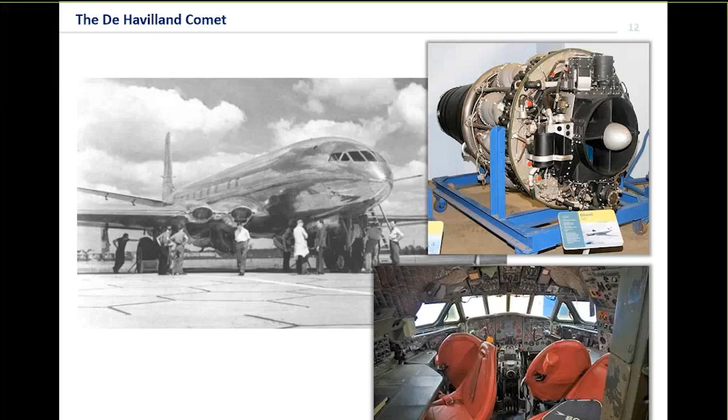In terms of aircraft of its type, it was 10 years ahead of its competition. The Boeing 707 first flew in 1958. It flew twice as fast as any other commercial aircraft of its day, at 500 miles an hour. And for comfort as well as economy, it actually flew much higher than any other aircraft, at 40,000 feet.

Now, it was built for comfort. Sir Geoffrey de Havilland, the company owner, really was taking his lead from luxury travel of the trains at the time. So he built it with large square panoramic windows, just like you would have in a train. Because it flew so high, it was the first airliner to ever have a pressurized cabin. And it pioneered the use of stressed skin construction that used both rivets and adhesive, so a hybrid joint.

It was the first commercial airliner to store fuel in the wing cavities. First commercial airliner ever to have power-assisted flight controls. Strangely enough, they were hydraulic controls. Because the hydraulic controls took away a lot of the feel from the pilot, it pioneered the use of a simulated control feedback as well. Things that we see in every airliner today, really. That was called Q-feel. And everything about it really set the design for pretty much every airliner until we get the new generation of composite airliners today.

Of course, when you're pioneering something that is so revolutionary in so many areas, you're going to get design challenges. And the biggest challenge for the Comet was weight. Weight was an absolute premium. De Havilland wanted to use his own jet engines that he'd bought the company previously. They were the de Havilland Ghost, but they were very limited to just 5,000 pounds of thrust. In fact, they were so worried that the airliner wouldn't get off the ground that the original plan even had booster rockets. So I'm not quite sure what they would have done about the noise abatement in those days.

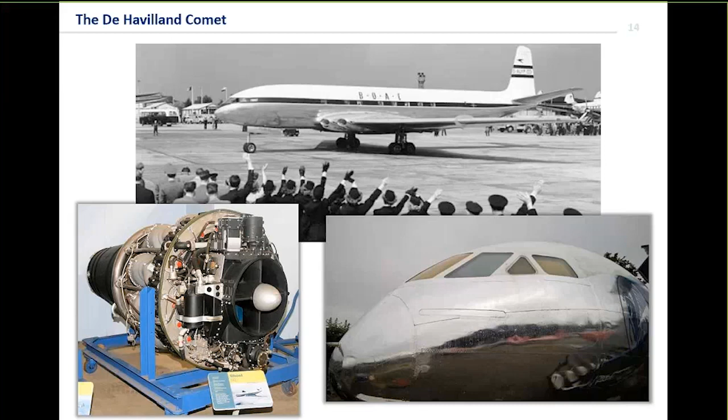Because weight was a premium as well, it used a really thin fuselage skin. It was 22 gauge, which for European people is 0.64 millimeters, so really thin for a stressed skin fuselage. And the reason it wasn't painted wasn't to make it look pretty, although it did look pretty. It was actually because the paint would have weighed too much, and therefore they couldn't have carried as many passengers. Later on, you see that the engines were changed to the Rolls-Royce Avon engine. But actually, they weren't in production until 1950, a full year after the Comet officially launched.

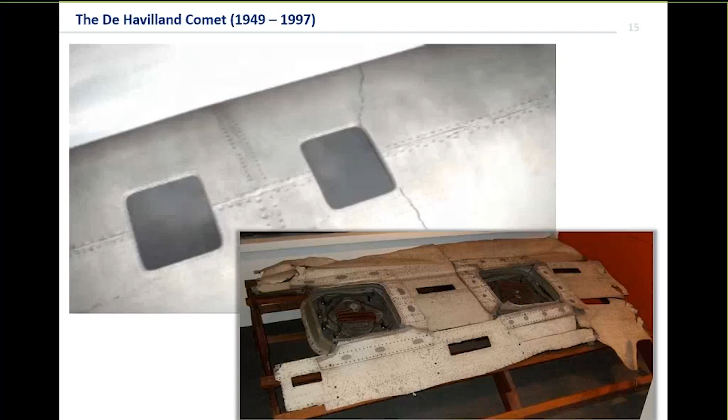Now, there are a few failures early on in the life with wing design and things like that. But the real ones, the ones that we're interested in, were fatigue failures. The first one happened on the 10th of January on a flight from Rome in 1954. The aircraft, Yoke Peter, fell apart in the sky, and all 35 passengers lost their lives. The initial conclusion was it was down to fire, an explosion in the air. But less than 3 months later, on the 8th of April, another flight, again leaving from Rome, this time to Cairo, also exploded, and 21 people lost their lives. And after that, the aircraft was grounded for investigation.

What followed was the largest crash investigation ever undertaken. A water tank test was built, and an aircraft was taken out of service. It had already seen 1,230 real flights, so those are the ground-to-air-to-ground cycles. And what they did in this tank was start to simulate those ground-air-ground pressure cycles in the cabin. After just 1,830 simulated flights, they found there was a catastrophic fuselage failure.

So that failure occurred after just 3,057 ground-air-ground cycles. And the conclusion was that fatigue, having a ratio of about 3 to 1, meant fatigue life could be estimated somewhere between 1,000 and 9,000 cycles to failure. If we look back at the very first aircraft that crashed, it had done 1,290 flights, and the second aircraft had done just 900. So that bore out the results of the water tank test.

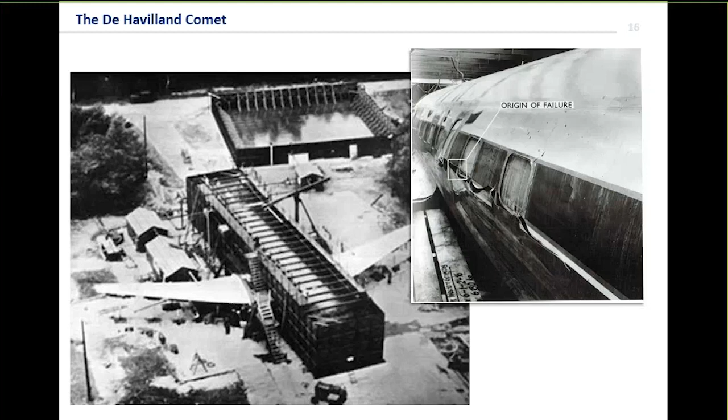When we look back at the history, the biggest thing that people remember is that square windows give stress concentration, so we don't use square windows in aeroplanes. But actually, de Havilland engineers did know that, and they designed their windows and all of the fastenings around them to cope with those stresses.

Reality was that wasn't really what drove fatigue here. The biggest culprit was that the original design was a hybrid joint. It relied on Redux bonding with drilled riveted construction, but the actual construction of the first Comets was punch rivets with no bonding at all. So why does that make such a huge difference?

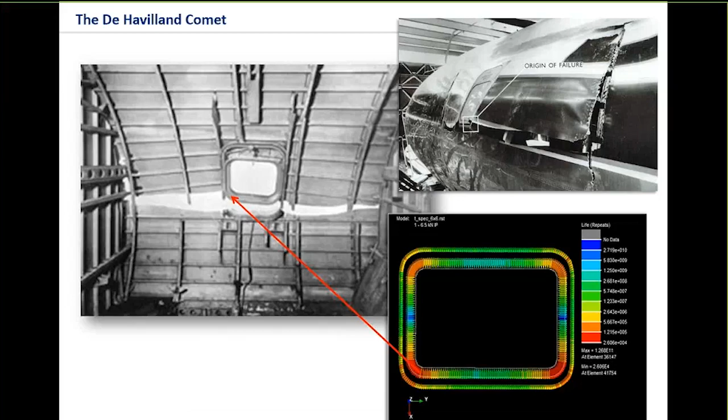I'm going to plot an SN curve, and we're going to look at SN curves today when we test materials. On the y-axis, we've got the stress - this is the amplitude of stress from the ground to air to ground cycle. And on the x-axis, we've got the log of the cycles to failure, the number of cycles.

Now what we find is if we've got a bonded joint, it's pretty much like a binary. If you drop the stresses low, it almost never fails through fatigue at all. But once the stresses get above a critical amount, it will fail almost instantly. So it's a very shallow SN curve, very long lives at lower stresses, but raise the stress above that critical level and it fails catastrophically.

Now, if you add to that a rivet joint as well, what you end up with is a bit like the best of both worlds. The drilled rivet joint can cope with those high loads, but as we reduce the load, we see that it will still fail - that's because with the rivet joint, it's starting to initiate cracks, and those cracks grow until we get a failure.

If we've got a bonded and riveted joint, we can take advantage of both. Normally, under normal flight, we're using the bonding, which has a very high life. But if we get bad landings and things like that, or overloads, the rivets can take those loads without it breaking the bonding. Now, if we were to change that, as we did in the Comet, for a punched rivet joint...

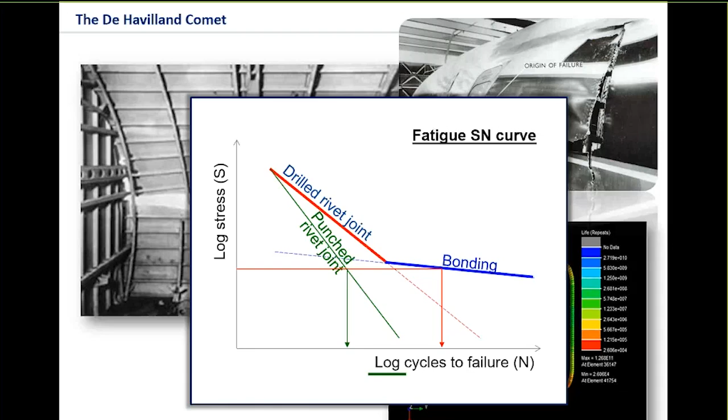A punched rivet joint isn't as good as a drilled rivet. With a drilled rivet, it's got a nice smooth edge, but a punched rivet has a rough edge, and those fatigue cracks can start a lot better with rough edges. So we find out, when we look at the real fatigue life on that log axis, that it's significantly less than what the original design intended it to be. And this really is what caused the failure of the Comet so prematurely and early.

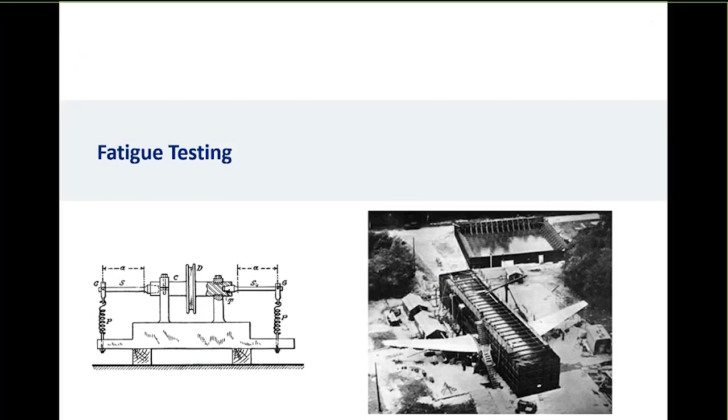Now, it's not that the engineers didn't know about fatigue - the de Havilland engineers knew very well about fatigue. Fatigue testing started really in about the 1850s. August Wöhler was looking at the progressive failure of railway axles. He was a clever bloke, was Wöhler - not only did he invent the first fatigue test, he went on to lead the German railway industry and was actually a very popular and accomplished politician as well in Germany.

So he invented the first fatigue test, and you can see a little illustration of this from the patent just down below. What he did was he put two axles into bending - we can see those on either side. The spring applies the bending load, and then pulley D was applied to a motor so he could rotate the shafts. As I say, he was a clever bloke, so not only did he invent the first rig, but he also invented the first data logger as well, because a fancy arrangement with string and pen meant he could actually count the number of cycles without actually having to sit there ticking them away on his watch.

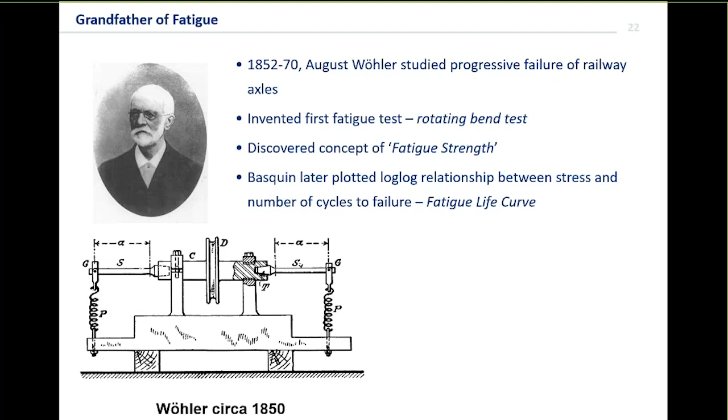So what Wöhler was interested in was a concept called fatigue strength. What he did was he found out with his mild steel shafts that if he was to drop the load to a sufficient level, then they would appear to survive forever - fatigue would never be a problem. And we call that the fatigue strength. Now, that was actually all Wöhler was interested in - he wanted his shafts to last forever. They were rotating many, many cycles, and that was good. And we still use that today for shafts which are rotating a lot in their life, like crankshafts and camshafts and things.

Later on, another fellow called Basquin found that when you're in the finite fatigue regime, if you were to plot the failure points on log axes, you could draw a pretty neat straight line through those. And we call that today the Wöhler curve, or the SN curve, after Wöhler, who created the very first test machine.

Wöhler was testing mild steel under constant amplitude sinusoidal load, and it is true that you find there is a fatigue strength threshold for mild steel under constant amplitude loading. But more generally, for most materials, we find that's not true.

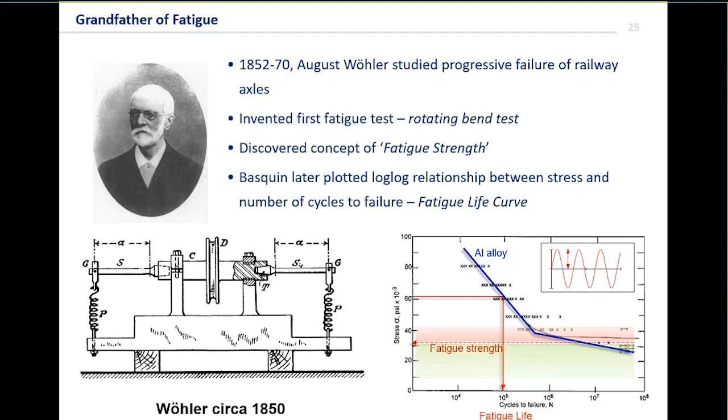If we looked at an aluminium alloy, for instance, we see a very definite change at that transition, but it's certainly not an infinite life that we see there. And even steel, under variable amplitude loading, has a gradient to that line. It's not infinite life, but we'll come to that later.

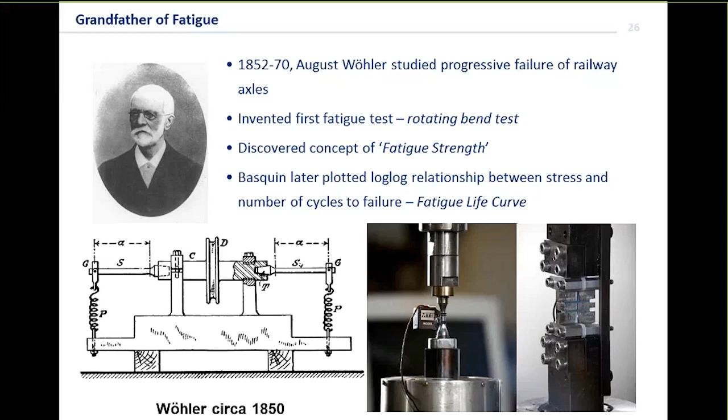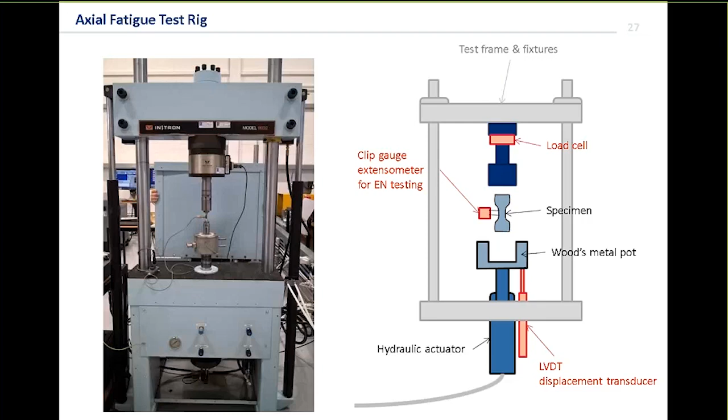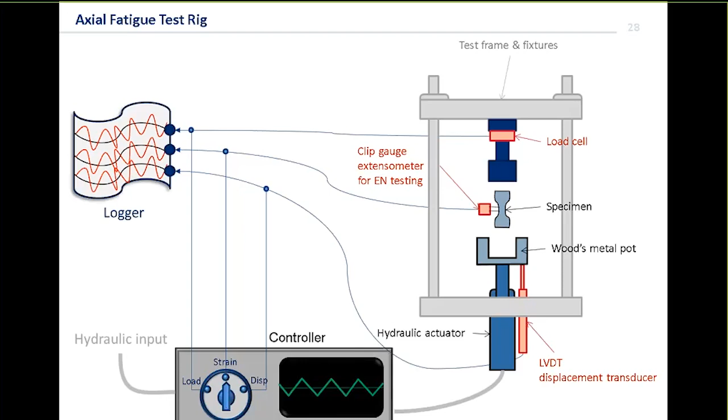Now there are three sensors, as I say: the load cell, the clip gauge, and the LVDT. Through our control system, we can control it through any one of those three. Today we'll be looking at load control testing, effectively sending a command signal, like the triangular signal you see in this controller, and we want the load to actually follow that command signal. The other thing we could do is look at strain, using a clip gauge for a strain-controlled test, or we could do displacement control as well. I won't talk about those today. Load control or stress and strain are by far the most popular.

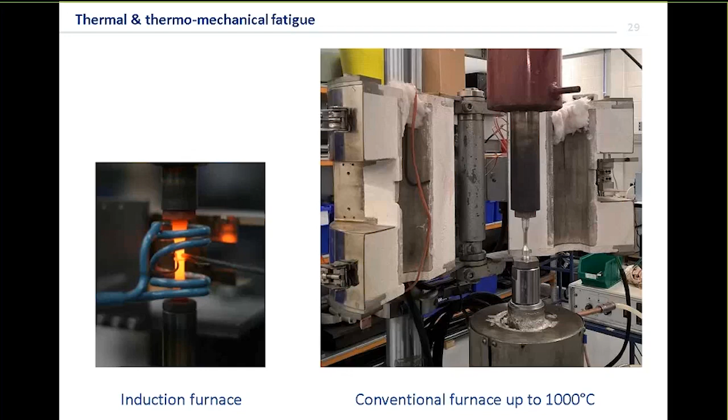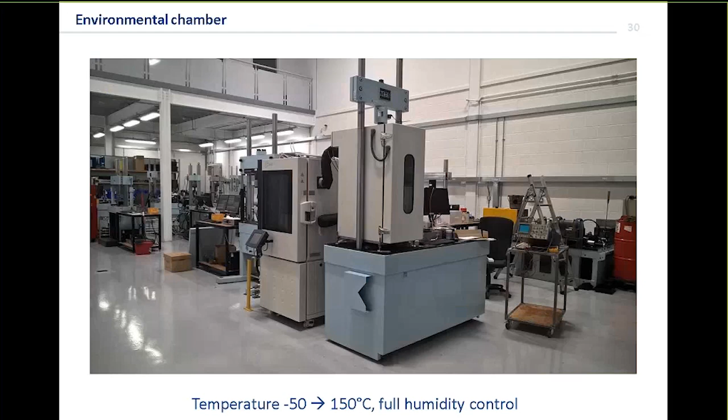Okay, so we've had a little virtual tour of the lab. We've seen what a rig looks like. Let's have a look at the analysis then that we need to do.

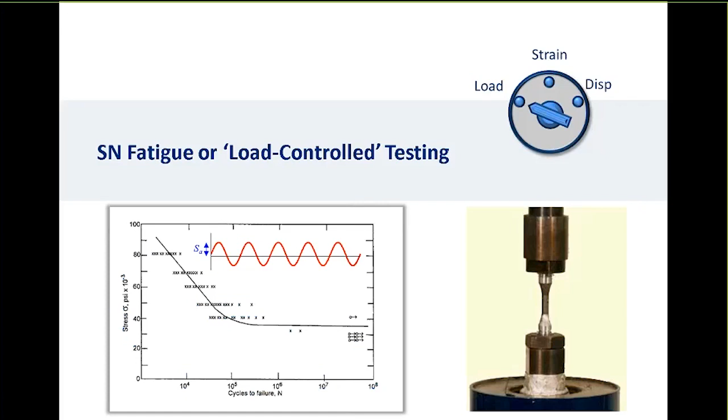We're going to start off by looking at load control. So this is stress control, if you like, load control. It's where we're deriving an SN curve. So if we were to look for a typical rig setup for load control, we actually see that it's a specimen like this hourglass specimen. We give it a command waveform. We can see here that we've got a sinusoidal stress profile.

What we try and do is plot the number of cycles to failure on log axes. And we see here, if we start to look at that, we can start to see this straight line forming through there. We can represent that using a simple equation. This is the Basquin equation. It's the equation of a straight line in log space.

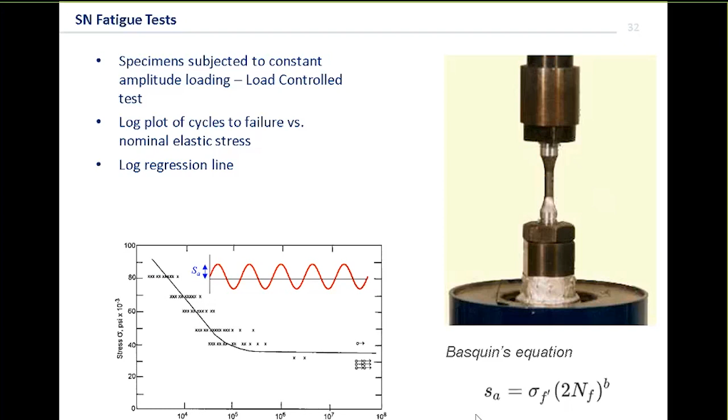Now, when we try and fit a curve, just two things to remember. First of all, an SN curve is not a single straight line. Typically, as we'll see in a minute, the SN data has three distinct regions. So make sure when you're fitting a straight line, you're fitting it through the correct region, otherwise you're going to get the wrong results.

And the other thing is, if you come from a reliability background, a fatigue test, an SN test, is not the same as a reliability test. You can't use MLE and use the suspended tests for that. So what that means is normally in a reliability test, if the test is suspended because you've hit the run-out limit, then you can still do some nice statistical trickery using probability to include those results in your analysis. But with SN, you can't do that. That's simply because it's a different failure mode when you get into those post-endurance regions. So you can't imply that the same statistical distribution was present from the other tests.

So that's just a little word of caution for you there. Don't treat these as suspended tests in fatigue, because very often run-outs are a different physical failure mechanism.

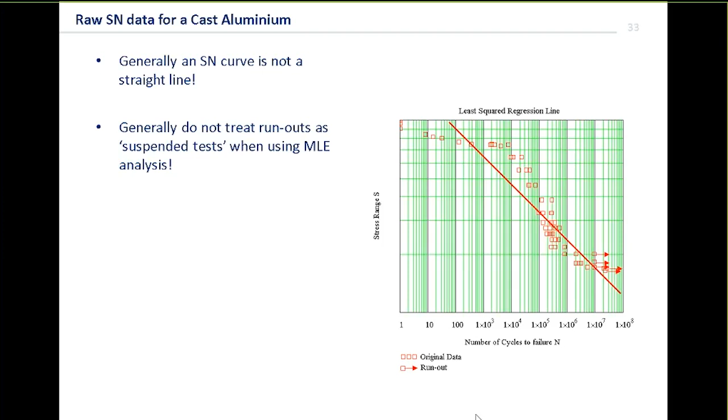So when we look at these typical data, we find that they fall into three distinct regions. At the top, there's the plastic region, there's the elastic region in the middle, and then there's the post-endurance region after that. They're characterized by two transition points. The transition life is the one that differentiates between plastic and elastic, and typically this lies somewhere between about 1,000 and 10,000 cycles to failure for most metallic materials.

Further along than that is the endurance limit. So this is either the endurance, the infinite life one, if you've got mild steel under constant amplitude loading, or in aluminiums we call it the endurance limit simply because there is a change of gradient. They're typically lying between about 10 to the 5 and 10 to the 7 cycles.

Beyond the post-endurance is a different slope, and we can test that using high cycle or vibroacoustic testing. But in general, a lot of people aren't particularly worried about that life and characterizing it, so there are also correction factors we can apply too. Either it can be infinite life, it can carry on the same gradient, which is conservative, or after Haibach, for instance, there is a correction factor where you can estimate that if you've not gone to the expense of measuring it.

So when you're fitting your straight line in whatever software product you want to use, make sure that you're only fitting the bit that's in the middle, the elastic region.

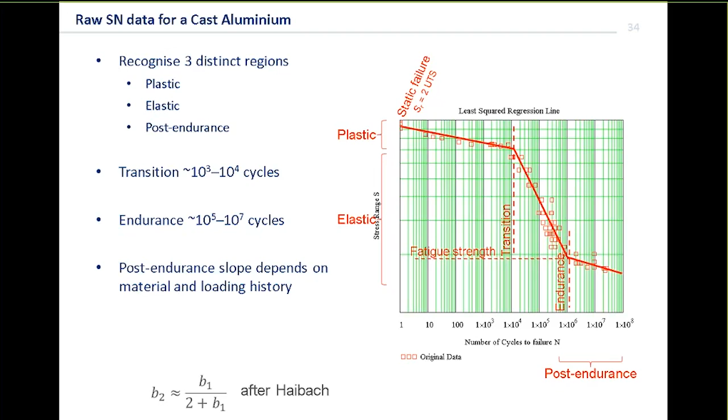If you want to characterize the post-endurance region at the very high cycle, there's another technique we can do. It's called staircase testing. This is where we're trying to find a fatigue strength.

The first thing we do is we establish an endurance limit in our design. It's very often something like 1e6 or 1e7 cycles. That's where we define what our infinite life is going to be.

Then, based on our SN analysis, we can estimate what we think that fatigue strength is going to be. In this case, I'm going to use, say, 100 megapascals, as it's a nice round number, just as an example. We also need to set our stress interval as well, delta S. In this case, I'm going to use a resolution of 5 megapascals, which is probably fine.

And the way that we proceed is this: we do lots of tests, almost to destruction. So let's set our first specimen in the rig, and we're going to target it for 1e7 cycles. Now, our first one here actually failed before that target.

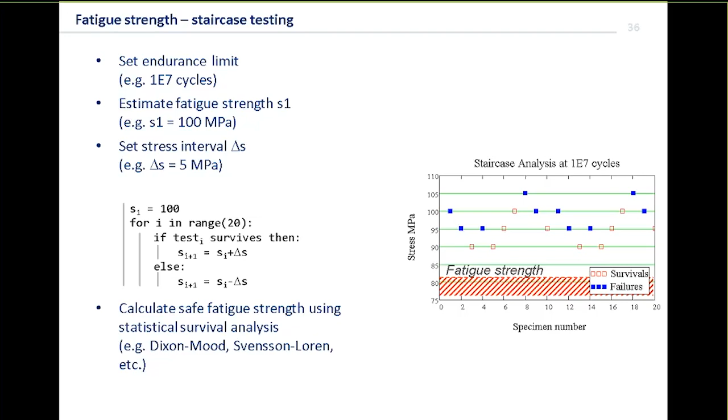Now, SN analysis works really well in the elastic range, but it doesn't work very well for plastic loads. We call those low cycle fatigue, where we've got plasticity introduced. The reason for that is because we're measuring the elastic stress, when actually the thing that's driving fatigue is the shear strain energy.

So what we find is that zone, when we're in the SN curve, is very shallow because we lose resolution. A tiny change in stress has a massive difference in fatigue life. So if you're really interested in that, rather than using stress, it makes sense to use strain instead. Because if you think about it, a small change in strain will create a smaller change in life, and you need a big change in strain to get the big changes.

So typically we only use SN up to the elastic limit, and beyond that we need to use strain, because strain is much better related to the component that's really doing the damage, which is strain energy.

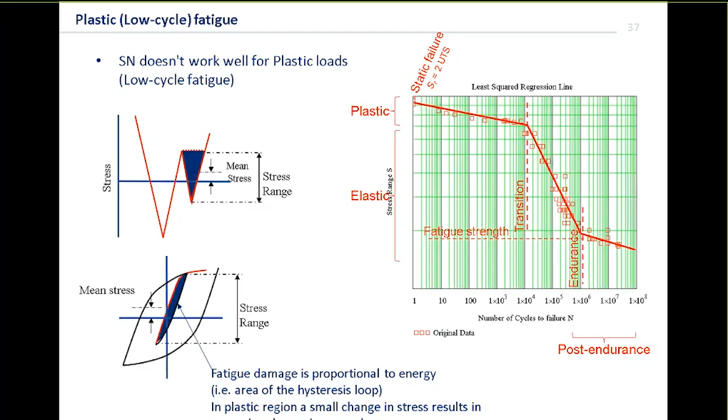And that really is where EN, or strain controlled testing, came in. It allows us to consider those low cycle fatigue, those high amplitude cycles, which may only occur once every blue moon, but they do create exponentially more damage. So how do we test those?

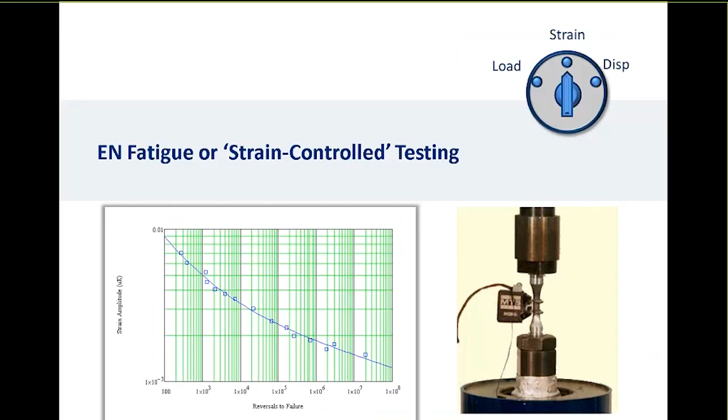So here you can see what happens. Our elastic line is that Basquin equation. So now on the y-axis it's strain rather than stress. And if we look at that Basquin equation, all we've done is taken the SN curve and divided it by E, Young's modulus, to turn it into an elastic strain.

What we've then done, though, is we've added this other part to it, this Coffin-Manson part, epsilon f prime times 2Nf to the power c. That's what we call the plastic line.

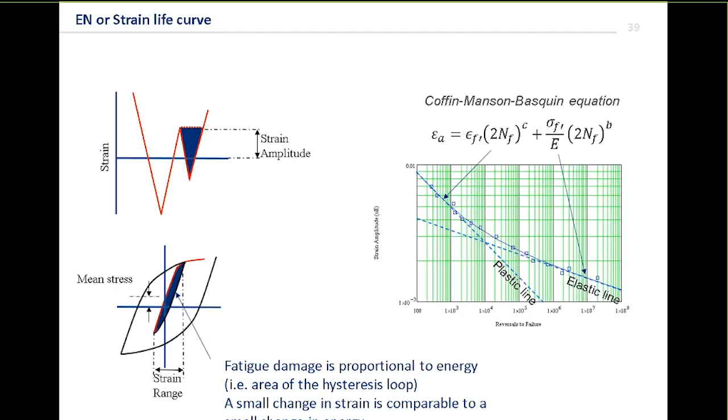And now what we see is we're now measuring strain amplitude, so it'll take a much bigger change in strain to get a change in fatigue. That means we can start to plot with far more precision what's happening in that low cycle, but high amplitude fatigue range.

In strain life, we actually need not just a fatigue curve, but we also need that relationship between stress and strain. The reason we need that is twofold. Firstly, when we consider things like mean stress correction, if all we're doing is measuring strain, we need some way of finding the stress in order to do the mean stress correction.

But the other thing is, most FE users will do a linear analysis in FE even though there may be some local constrained plasticity. So we'll probably want to use something like Neuber's rule to turn that linear measurement from FE into an elastic plastic measurement for this.

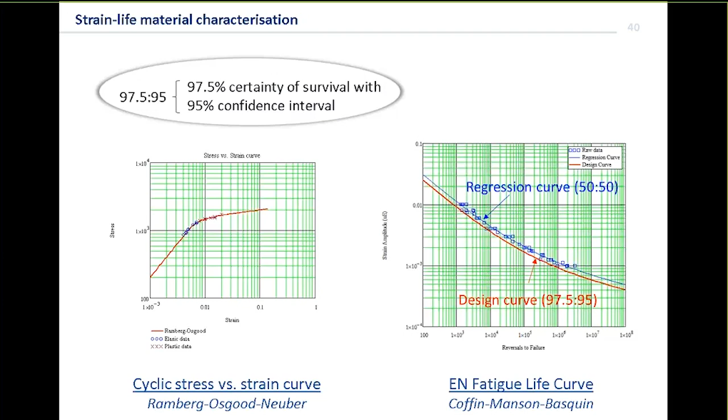And again, that cyclic stress strain curve allows us to do it. So how do we fit the cyclic stress strain curve? Well, we use a simple approach, an equation, a model called the Ramberg-Osgood-Neuber flow rule. If we were to plot the stress strain through the linear and the nonlinear range, we can start to see it follows either that red or that green line.

What the Ramberg-Osgood model does is try to fit a simple equation through that. The equation is simply, we know in the elastic regime that the elastic strain is simply the stress over the modulus of elasticity. So what we do is we add a plastic component as well, modeled as stress divided by K prime raised to the power of 1 over N prime.

So you can see what we've done. We've fit a straight line in log space through that, and we see that in that right-hand plot. So the way that we find the parameters for this Ramberg-Osgood is simple.

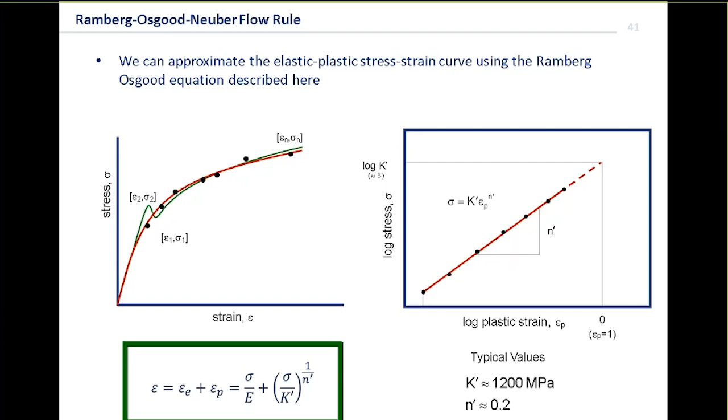The first thing we do is we look at the low stresses and we fit the elastic line through that, and we find the modulus of elasticity E. Then when we get to those higher stresses where there's plasticity involved, we subtract the elastic part and we plot on log paper the remaining parts. If we fit a straight line through those, we can then find out the K prime and N prime. So all we're doing again is fitting a straight line in log space.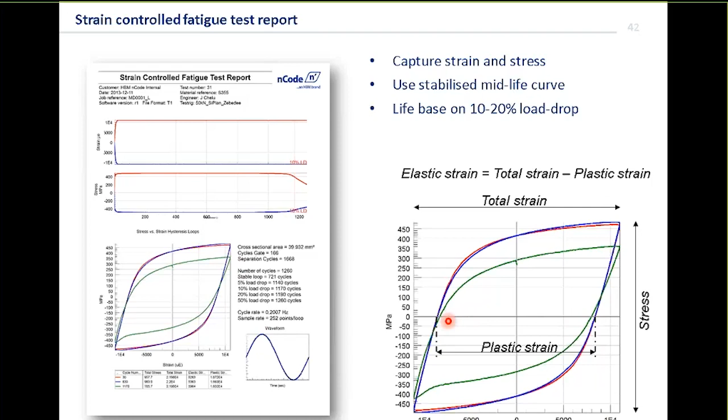So the total strain is the distance from left to right here. From this loop, we can see where it crosses the zero stress line, then that becomes the plastic strain. And if we take one from the other, that gives us the elastic strain. We use those two values, elastic strain and plastic strain, when we fit the Coffin-Manson equation down here. So when we characterize it, this is what we do. We start off first of all by characterizing the Ramberg-Osgood, the cyclic stress strain plot that you can see here.

What we then do is find the life based on the load drop, and then we start fitting the elastic line. So we take the elastic strains and fit the Basquin equation, the sigma f prime and the b for those elastic strains. We then take the plastic strains that have been separated from that analysis, and this allows us to fit epsilon f prime and c.

Typically, what we need to do is add them together, and they usually add together quite nicely to fit the entire curve. But we usually do a little bit of re-optimization on these parameters, just so it fits better, especially in the middle where the two are added together.

Once we've got a good fit, we then start to do an outlier analysis. In an outlier analysis, we're looking for points which don't lie on that curve. Now, some of that's going to be just statistical scatter, and we're going to use those in our design curve, so we're not worried about those. But some of them are clearly indicating that they don't lie on that regression line.

And that's very interesting. We need to know why that is. Can we exclude them? Have they failed in the grips or something like that, which makes it an invalid test? Or is it really a valid test? And what we're looking at now is characteristics of the material as well, and these characteristics could be fed into your components. So we need to characterize that spread if that's the case.

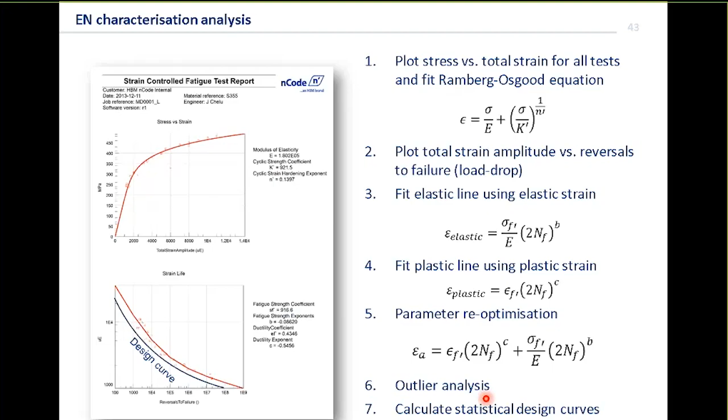So what is the design curve? Well, that regression curve is the best fit curve through the data. We call that the 50-50, or the B50, curve. And what that's telling us is that half of your samples have failed at that point. So we don't necessarily want to use that for designing things.

So instead, we create a design curve, using so many standard deviations from that regression curve. So if we went for, say, a 95% reliability curve, that means we're getting 5 failures in 100. If we went for something like 99.9997%, that's about 4.5 sigma, that's 3.4 failures in 1,000,000, and so on. And 6 sigma would manifest itself into about 1 failure in 1 billion.

Now, it's worth pointing out that most people, when looking at a design curve, typically look at something like a 97.5% design curve, or 95% as well. Now that sounds like a lot of failures. If you're going to be producing 250,000 cars and expecting 2.5 failures in every 100, that's an awful lot of warranty claims, for example. And we dread to think what would happen in aircraft.

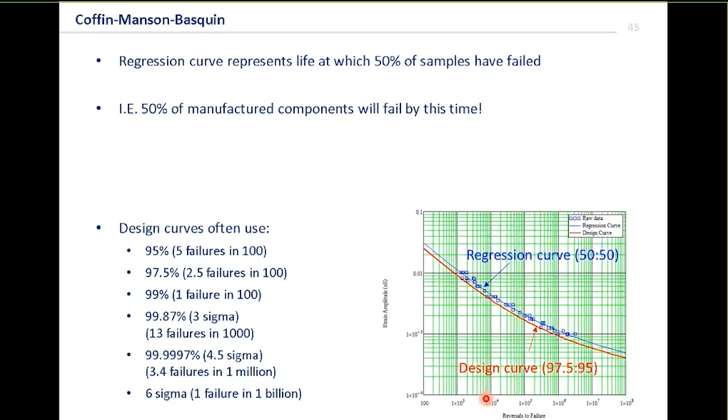The reality is, though, that this is just one statistic in many. We're applying this statistic to the materials. We've also applied statistical safety factors to our stress analysis, safety factors to our load calculation, and everything else downstream as well. The important thing is to make sure that when all of your statistical reliabilities are combined together, you're achieving the failure rate that you want, maybe a 6 sigma or 4.5 sigma failure rate, for instance. It doesn't mean every single statistic down that stream has to have that same level. So typically people ask for 97.5 or 95% reliability curves.

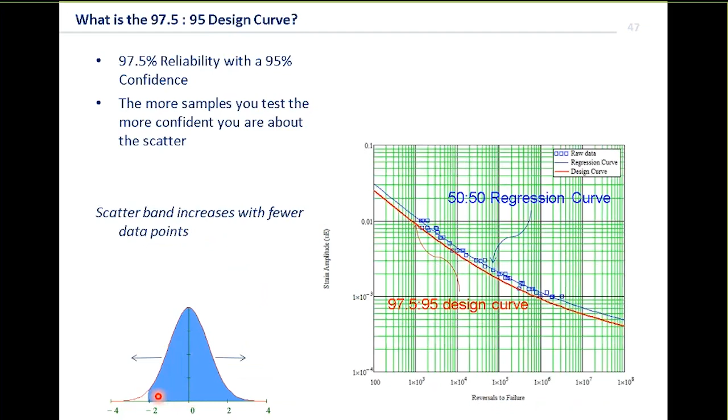Now, as well as the reliability, there's also a confidence band, and the confidence band is set by how many tests you actually did. So what we're looking at is the deviation from the mean, the regression curve. If we need that standard deviation, the more points we have, the more confident we can be in the number. If all we've got is 6 points, then the standard deviation we estimate could be wildly inaccurate. The more points we have, the more sure we can be of it.

So we have two options here. One, if you want to get more accuracy, put more points in and do more tests. If you want to demand more confidence but not change the number of points, you have to add a safety margin instead.

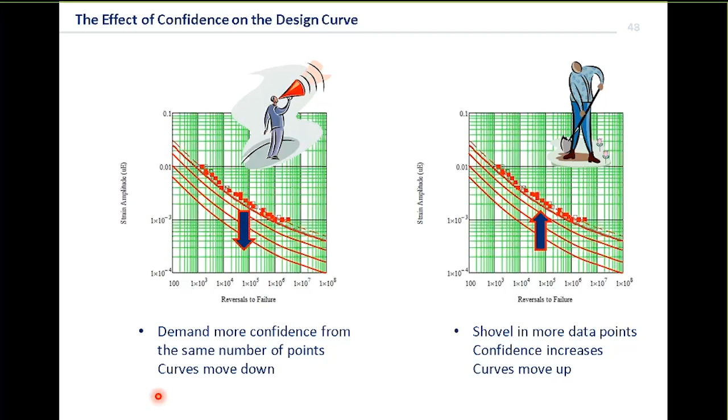There's another question I want to hit before we get to the case studies: do you move the curve left to right along the cycles to failure axis, or do you move it up and down along the stress or strain axis? This is a question we get on an almost monthly basis. It's complicated because the statistician will answer one way, but it really depends on how the equation's written.

The statistician's answer, and they're quite right, is that the strain amplitude in this case is the independent variable - the one we know is true. We set our rig up with the strain amplitude fixed; it's constant and cannot vary statistically. So in theory there's no way the curve should move up and down. The dependent variable is life - that's the thing that changes statistically. So the curve, in theory, should move left to right, dependent on the reliability we're after.

In fact, when you do an SN analysis, that's exactly what we do - we move the curve left to right in terms of its reliability statistic. However, in strain life, we move it up and down. The reason is that the strain life equation, the Coffin-Manson-Basquin equation, is a transcendental equation - we can't rearrange it in terms of NF as a simple function of strain. So in this case, we apply a separate scatter factor effectively on the plastic and elastic sides, and that effectively moves it up and down.

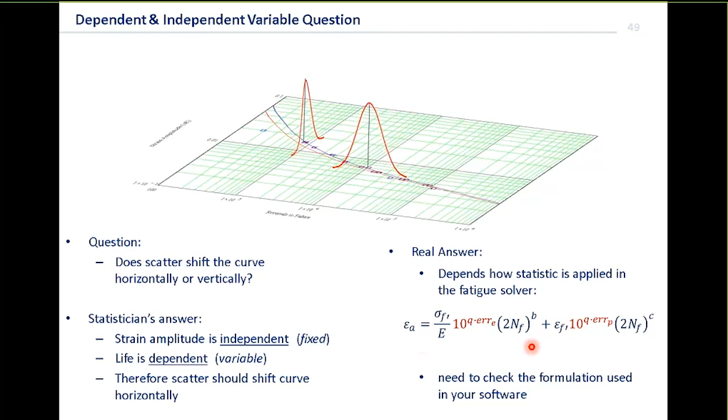If you've still got more questions on that, we can talk about those when we're finished. So I just want to finish now with a couple of case studies just to show you some of the work that we do on a regular basis.

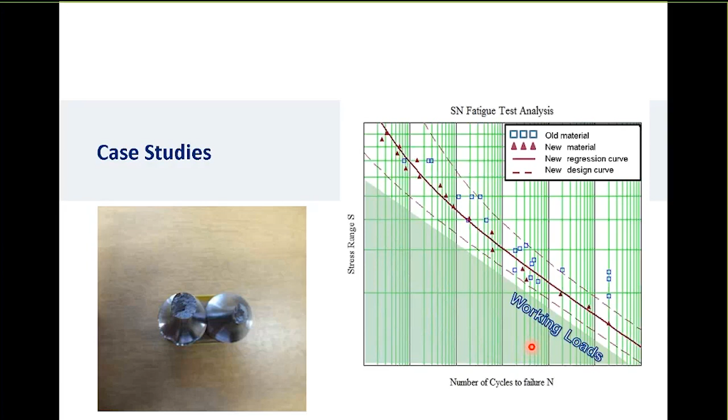My first one is the experiment I talked about earlier on sample size - how many material samples do I need to get a good design curve? This happens all the time. Whenever a new customer who's new to fatigue or testing comes along, they ask how many samples they need, and very often they turn to things like the ISO standard or the ASTM standard, which come up with a number of about 15. However, is 15 the optimum for a design curve?

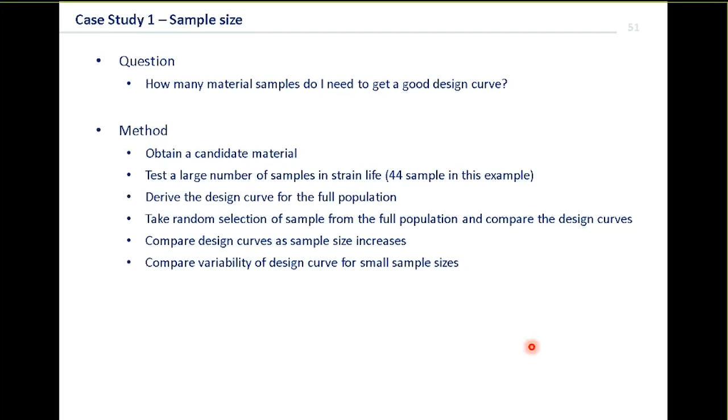In this experiment, we've obtained a candidate material, a very common mild steel in this case. We've tested a very large number of samples - 44 samples - and derived a design curve for that full population. We've then taken several random selections from that full population and compared it with the design curve. What we're trying to do is find the point where the design curve becomes economically optimum - adding more points doesn't improve it any, but if we drop points, the safety factor becomes large.

So here we can see the full family of 44 data points - you can see the nice fit there. You can see the red line here is that 97.5, 95 design curve, and here you can see the fit through the elastic and the plastic points.

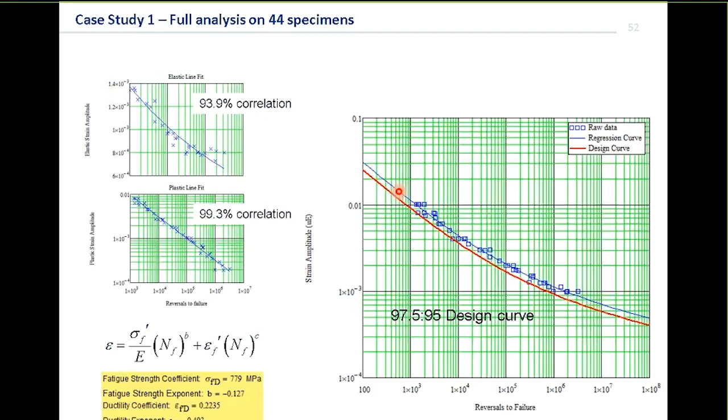Now here you can see what happens when we reduce the number of points. If we have 6 points, that is clearly the minimum we can use to fit two straight lines through it. So the design curve here is very low compared to the other one - if you look at it, it's moved quite a lot over because of that.

Actually, the bigger problem with 6 data points is it's almost impossible to get them aligned evenly along the curve. They tend to come in clumps, so you'll get lots of points together but big gaps with nothing at all, and you've got no confidence in those gaps. 8 points is pretty much the same story, and so's 10 points.

It isn't until we get to 15 points, which is typical ASTM ISO territory, that we've got a good chance of a fairly even distribution. But at 15 data points, unless it's perfect, our design curve is still quite a high safety margin off. Typically we need 20 to 30 points before we reach this economic optimum. So at 15 points we could get there, providing it's evenly distributed, but usually it's not.

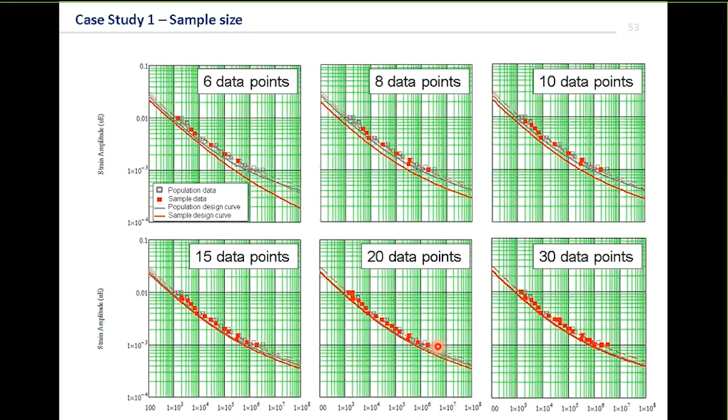By the time we get up to about 25 points, that's really where we get the optimum design curve for about a 97.5, 95 curve. Adding more than that isn't necessarily going to help. If we take less, we either get bias in the data or a significant safety margin because of the design requirements we're looking for.

Here's another case study, one that's come up a lot over the past few years. An old material no longer meets environmental standards - I'm thinking of hexavalent chromium, where we've reduced the chromium content significantly in stainless steels and are now looking for replacement steels, which probably aren't as good. We need to find out whether they're suitable for fatigue.

Our approach is to do a test of the old material, which we know didn't suffer at all from fatigue, then test the new material. If the new material is better than the old one, everybody's happy. The problem is it's often not that clear cut. In this particular case, our customer didn't know the service loads of every component they'd manufactured - it wasn't possible to measure it. So again, we had to use statistics.

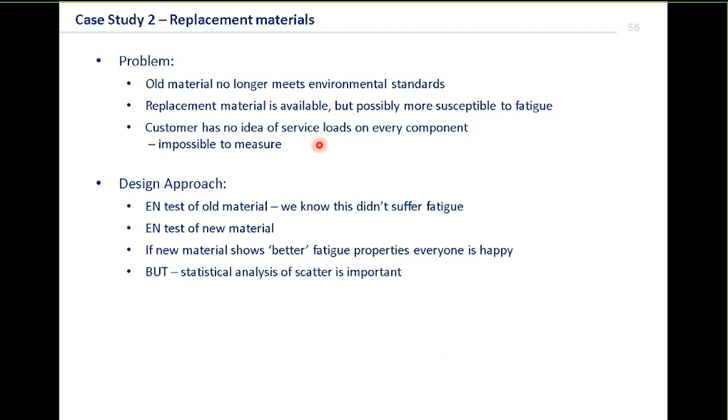So this is an ideal situation. The old material is shown in blue, and the new material in red. The red circles clearly show much better life than the old ones, so in this case there are no problems. As an engineer, we can sleep well at night knowing the new material has less scatter and a better fatigue life than the one it's replacing.

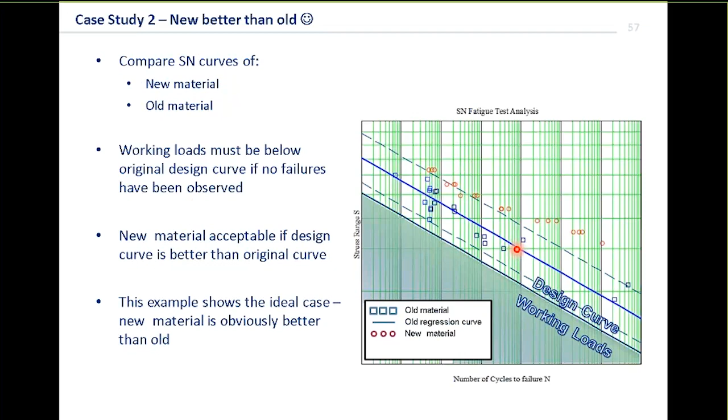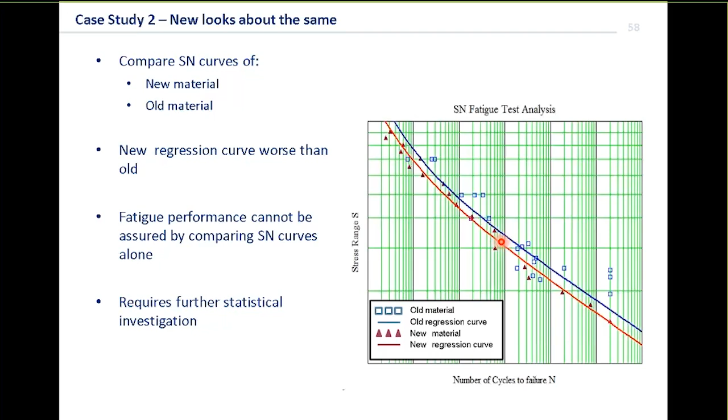So therefore there's little to worry about, hopefully. However, this is typically what we find: the blue squares are the old material, and this appears to have a better fatigue curve, a better regression line, than the new material replacing it. So straight away we can't say with any confidence that the new material is a suitable replacement - we need more fatigue analysis, more statistical analysis.

Now with this material, based on a real example, the customer didn't know all the loads. However, they did know that in the past 15 years no components had failed. So we can work out statistically, based on this data, that our working loads must be below a certain area - because with good confidence, we should have seen some failures if they were higher than that. Effectively, we're using statistics to work out where the working load range is.

It's somewhere down here. Now if we look at that, there's a lot of scatter - we notice the old material's statistical scatter is high. If we look at the new material, even though the regression line is poorer in terms of how well it fits the curve, we find its scatter is a lot less. We see this a lot with new materials - as quality processes in manufacturing improve, the scatter diminishes, and that's what we're seeing in this replacement material.

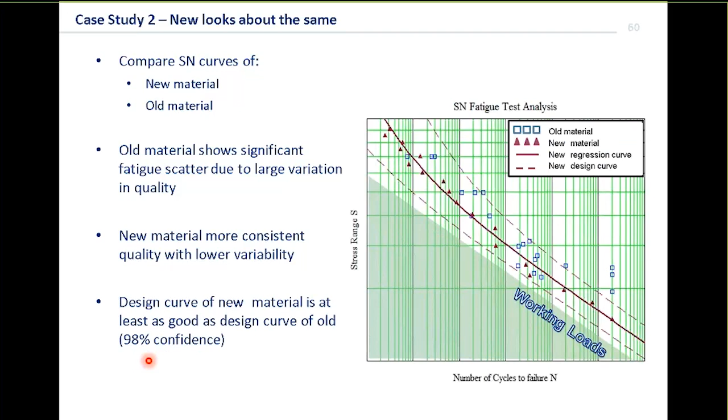So now, with the same sort of confidence, we can see that even though the regression curve was below, in terms of its design curve it's above - because it's a more consistent quality of material than the old one. So in this case, with a 98% confidence interval, we can actually say that the new material is at least as good as the old one, even though the regression curves don't match.

So the first thing we did was say, okay, we can't go and test all more than 20 materials in full for you—that's a very expensive test, so let's shortlist them. First of all, let's consider: is the design curve you're using so far still safe to use? Because if it is safe, you might not want to prioritize those.

Then we start to look at whether that current design curve really represents the material you've got. If it's very conservative, you might want to retest it anyway because you're over-designing components. Materials are improving in quality, so design curves are going up all the time. The idea is to create a prioritized list for testing.

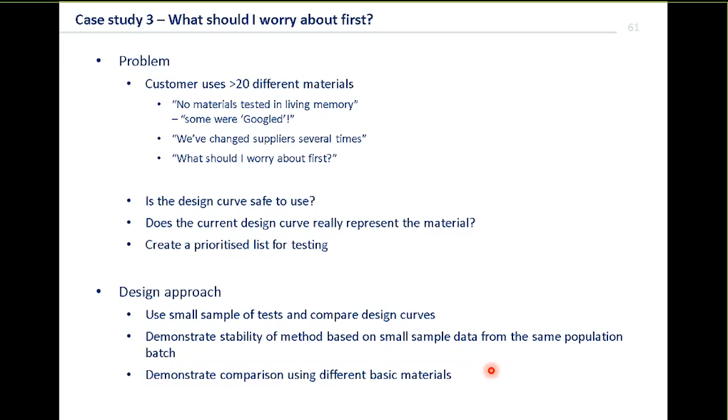So the way we did this was to use small samples of tests. Now, if we were trying to characterize a material from the ground up, as we saw earlier, you need at least 15 to get the regression curve, typically 25 if you want to get a design curve from that. But here we're using small numbers of tests just to start to see how far out we are with the data they're using.

So here we've got a comparison of new material B with the original design curve. If we've got the design curve, we can start to see that. Here we've done a 10% significance on these bands, and we can see that material B—first of all—it's not the same as material A.

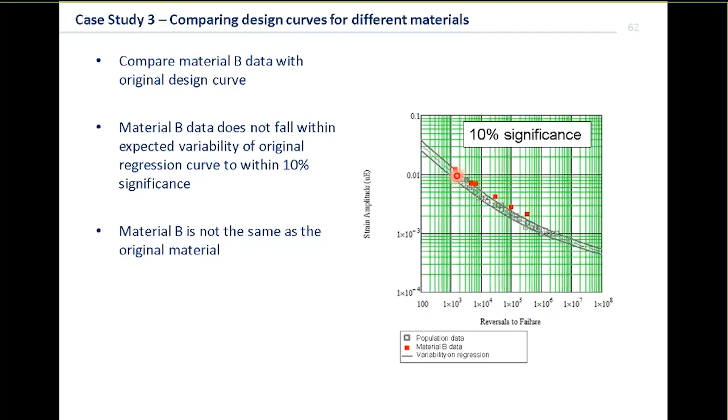So when we do this, we do it in two parts. The first thing is a test to see, statistically, is this material from the same population—is material A and B the same? If they are the same, that's fine. If statistically they're not the same, we can go on and ask: can I, with any confidence, infer that the new material is better than the old material?

In this case, we do accept that they're different, and we can do an analysis that shows we have 98% confidence that the new material is better than the original material, even though we've used just a limited number of samples for that.

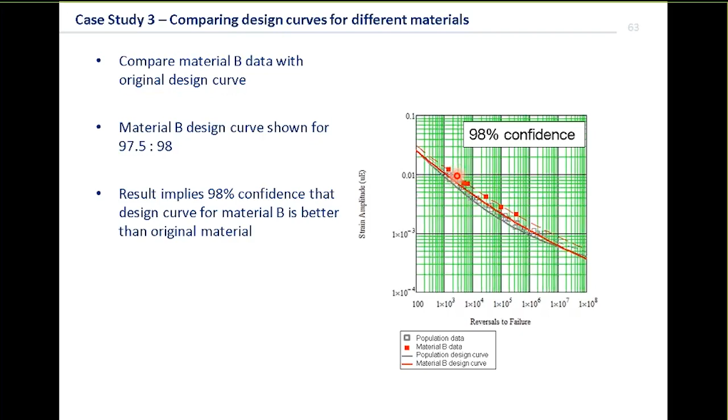Using this sort of approach enables us to explore lots of materials and prioritize those. Other areas where we do a lot of this are things like motorsport, where they're looking for new materials to replace old ones to get ahead of their competitors. So we're comparing different recipes of materials to see how the fatigue properties are, so we can shortlist materials for later production and research.

So in conclusion, I hope you've enjoyed this webinar today. We've had a look at an introduction to metal fatigue, and we've looked at a horror story—my favorite one—the de Havilland Comet. We've also looked at how we can characterize materials for their statistical reliability and confidence, and we've considered the SN approach and the EN—the stress life or Wöhler approach—and the strain life models.

And we've looked at three case studies. We've looked at how many specimens to test, and basically we've said if all we want is a regression line, 15 specimens is probably your minimum. But if you want a design curve, you should be looking at about 25 specimens at least. Otherwise, you'll end up with big safety margins coming in, or problems with biasness in how that curve is distributed.

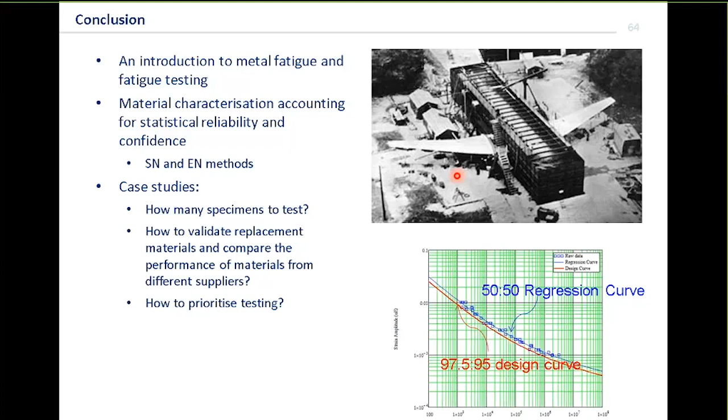We've also looked at an example where we validated replacement materials, or plug-in replacements, for different materials from different suppliers, even if they don't necessarily know what the original loading was. And we've looked at examples of how we can use simple statistics to help us prioritize testing.